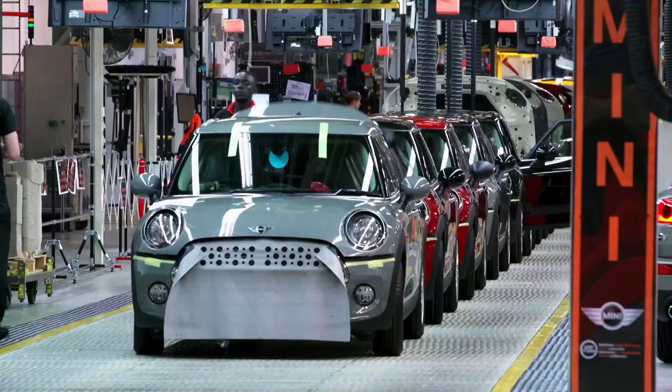Now, this British icon is riding high thanks to a tightly knit team.

There's a lot of camaraderie. We've worked together with a lot of people for a long time, so you build up that team spirit. A strong sense of family.

I grew up in Oxford. My granddad worked here in the 50s and 60s. Basically, I'm following suit. And a unique apprentice program.

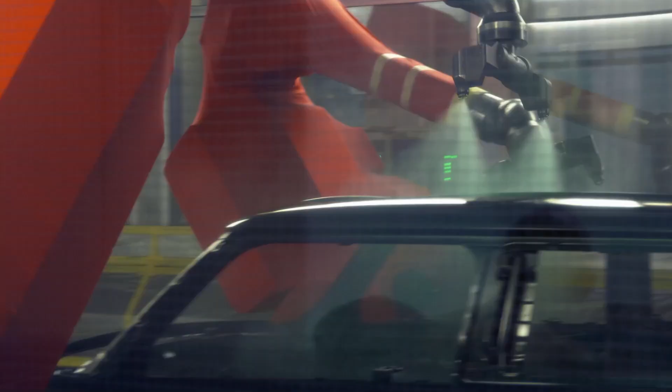We're protecting old school engineering skills. The result is a beacon of industrial hope. It just goes to show the fact that we are still a force for manufacturing within the UK.

Confidence that's best expressed in the fastest Mini ever made. The John Cooper Works edition that we make at the plant here is our supercar. The modern Mini Cooper, the everyman's supercar.

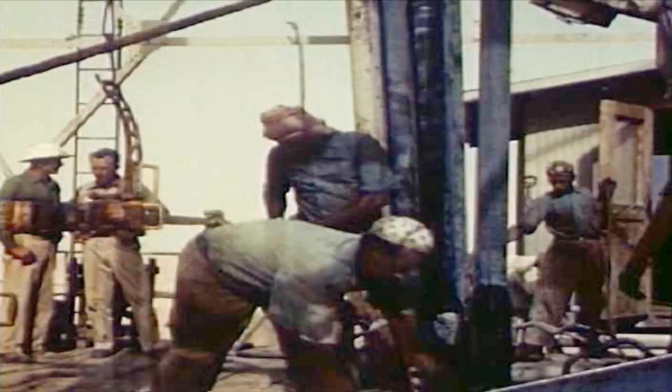It's a car born during a global oil crisis. One of the most influential designs of the 20th century. And a quirky machine that's unapologetically British.

The Mini was born in England, and it's great that it's still produced here. It's ours, it's quirky, it's got a look.

There's a lot of cars out there at the moment that you look at, and you have to see the badge before you know what it is. You see a Mini, you know you're seeing a Mini.

Minis aren't built for statistical bragging rights, but rather smiles per gallon. A fast little turbocharged go-kart, you're pretty high on the thrills per dollar scale.

Few machines offer as much performance in a smaller footprint. The Mini brand has always been about making a lot of performance from a tiny little package.

Base models start at just $18,000. But if you want a little more bang for your buck, the top-of-the-line John Cooper Works edition clocks in at a very reasonable $32,000.

It's going to surprise people, but the Mini is democratized performance. It's a small, quick, sharp-handling car that's a lot of fun to drive at a reasonable price point.

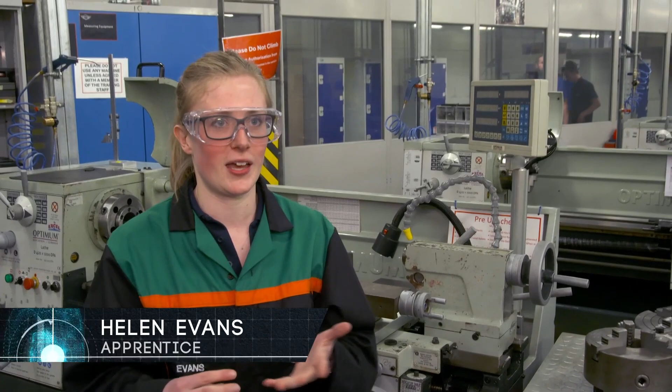Ultra-affordable performance paired with a fervently British sensibility. If you see stereotypical British things, you get the Bulldog, you get the Union flag, and you get a Mini. It's so intrinsically linked, which is nice because every country's got their thing.

Today, the brand sells cars in over 110 countries, and every single one starts the very same way.

It's got a strong brand identity and reaches to every corner of the world. So I often look at the destinations of the cars that we build on the line, and it's amazing. One car to America, the next car to China, then a car that goes to France, then Australia, New Zealand.

The Mini is a worldwide phenomenon that requires 3 distinct factories to get the job done. At the Swindon pressing plant, they manufacture body panels and sub-assemblies.

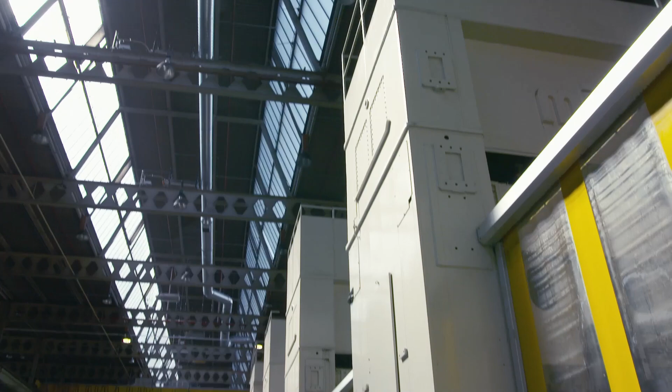They build 3- and 4-cylinder engines at Hams Hall in North Warwickshire.

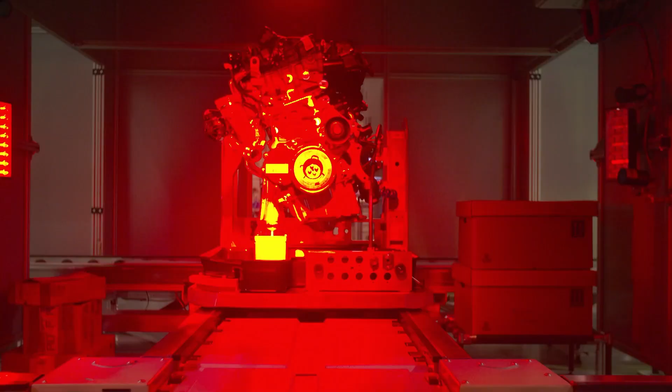And every day they produce 1,000 completed machines at the Oxford assembly plant.

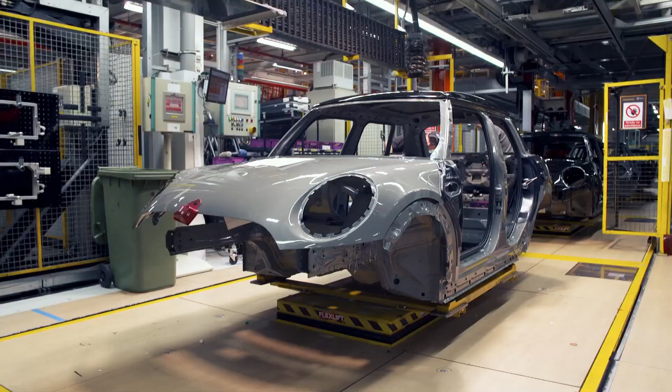Currently, we're building the 3-door hatch, the 5-door hatch, and the brand new Mini Clubman. In the past, we built up to 5 models on the same line.

In a given year, they manufacture more than 200,000 machines.

So the car has come in from the paint shop, comes in a set sequence. We've already started to fit some of the parts of the car.

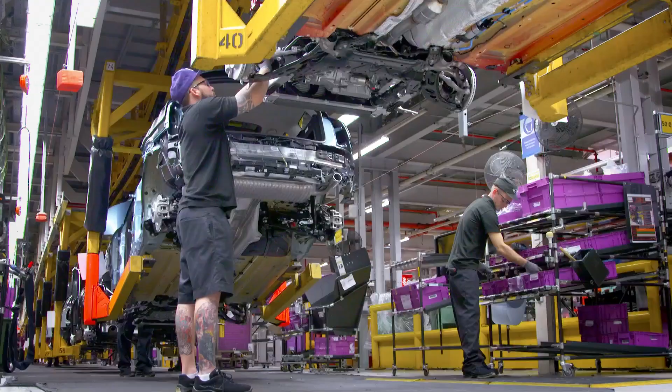Every 68 seconds, there's a car leaving the line. We are working more or less 24/5, so 3 shifts, 5 days a week.

The speed necessitates a lengthy 1.7-kilometer assembly line. There's 224 stations on the main line, so that's from when it first comes in from the paint shop to our final station.

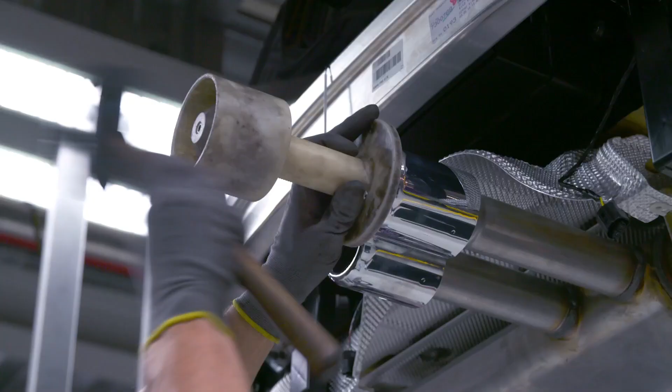Nearly 5,000 craftspeople bolt and wrench parts inside a facility that is nearly the size of 100 football pitches.

We're now at harness fit, so this is one of the really complicated parts of our process. We've got a big thing here, is the oven. We've got 18 harnesses in there, 60 degrees all the time. They're all sequenced in there. We get the harness one by one, we take them out and then we fit them around the car, clip them in, and they're all ready for the people to fix their parts to.

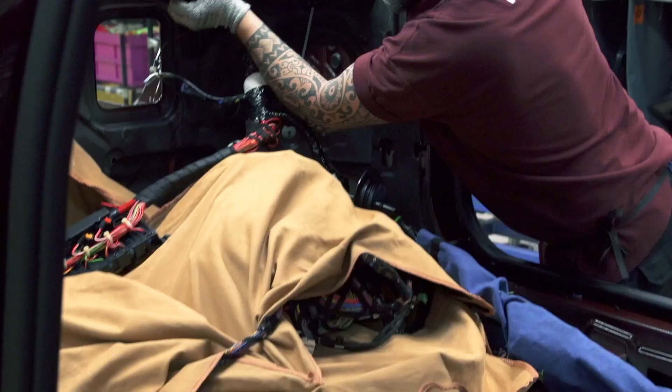Each harness weighs 20 kilograms and has over 500 clips that have to be snapped into place. My section is one of the most physically demanding areas because of the harness, because of the bending, and because of the thickness of the harness. It is quite a hard area. There's little downtime thanks to the high station count and the fast cycle times.

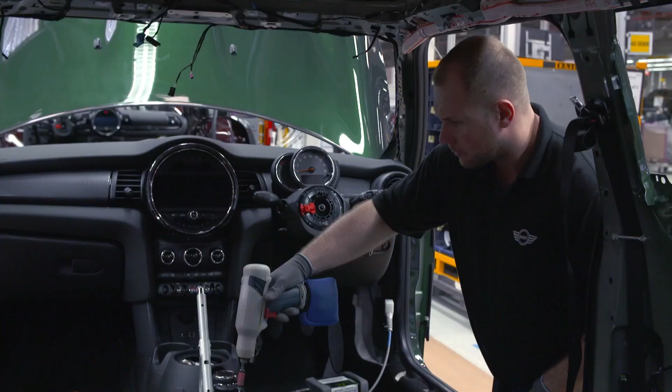To keep the line humming along, workers are backed up by another team of associates. These guys are the front line guys. These are the ones that put the cars together. They're the most important parts of our company. I'm here as a support function, so if they've got an issue, any problems, they let me know and I jump in and let them get on with the next bit.

We do our best. All the blokes, we're all basically on the same page most of the time, and we all strive to build the perfect car. And that's what the Mini is. It's becoming the perfect little car. And it's a good job. It's a proud place to work for, isn't it? The passion here is palpable and historic.

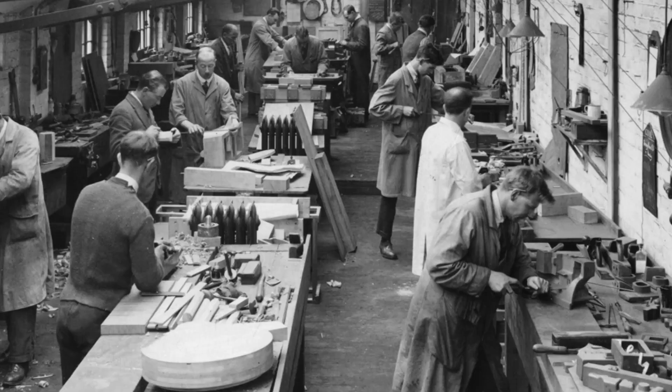This facility is the oldest mass manufacturer of automotives. Built in 1913, the Oxford site has produced over 11.5 million cars, spread over 7 different brands.

No, it's historic, it's iconic. We're very proud to work here and work for the name Mini. Very proud to know that I've been party to the manufacturing of that product. To be a part of such an iconic thing as the Mini, I think for me it's a great opportunity.

There's so many companies who change the basic formula. Mini hasn't done that. It's still a fun driving car as it was back in the 50s when it was first launched. The Mini might be a British icon, but its roots take hold thanks to a French diplomat named Ferdinand de Lesseps.

He's inspired while reading a book about Napoleon's early attempt to connect the Mediterranean and the Red Sea. It takes 37 years, but in 1869, his dream becomes reality when the Suez Canal opens. The waterway becomes a hub for international trade, and by the early 50s, 2/3 of Europe's oil supply travels through it.

However, in 1956, Egypt nationalizes the canal. The act starts a chain reaction that eventually leads to a worldwide oil crisis. The Mini story starts with actually a fuel crisis, an oil crisis, and a need for vehicles to be fuel efficient and affordable.

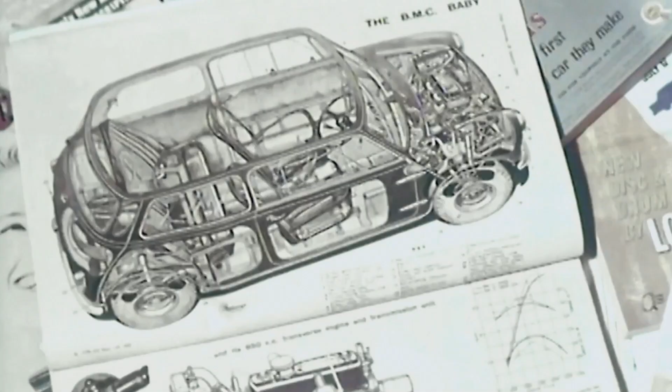In Britain, the government institutes a fuel rationing program that limits motorists to just 4 gallons of petrol per month. The restrictions inspire the British Motor Corporation, or BMC, to focus on fuel economy.

And they ask car designer Sir Alec Issigonis to create a thrifty machine. BMC came to him and said we need a car due to the Suez crisis in 1956. The task has a single mandate: fit 4 people comfortably in a car that can't be longer than 10 feet. He started in his kitchen, I heard, setting up 4 chairs and invited friends and looked at how much space do 4 people need, actually.

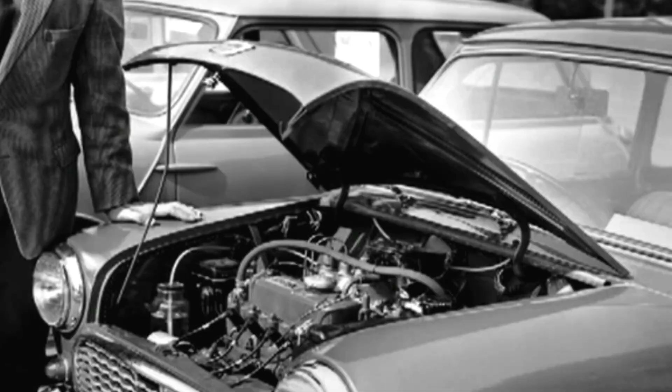Most cars at the time offer rear-wheel drive and use an engine that's longitudinally mounted. Issigonis's inspiration is to spin the engine 90 degrees. His best move was to turn the engine transverse. That's a principle which is set, I think, for small and compact cars till today. It's kind of a really genius construction principle.

Next, Issigonis decides to make his car front-wheel drive. Finally, he engineers a compact transmission that fits beneath the engine, not behind it. Issigonis's entire drivetrain occupies just 2 feet of the new machine and allows the remaining 80% of the space to be dedicated to passengers. As it turns out, he also designed a car that was a lot of fun to drive. And people started figuring that out pretty quick. These things handle pretty good.

They were a lot of fun. In 1959, the British Motor Corporation launches the Mini, a 2-door, 4-cylinder car featuring a monocoque shell. Initially, the machine is offered with a 34-horsepower engine, but gets a whopping 36 miles to the gallon. Heady fuel efficiency numbers even today. Yet it's what happens next that helps coin the term hot hatch.

Just 2 years after its introduction, the Mini's unique design characteristics, remarkable handling, and fun-filled driving experience captivate Britain.

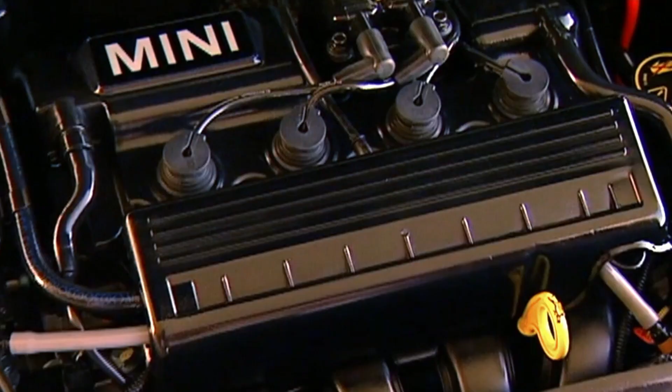This is a brand that, for its humble origins, for being a cute car, actually has a lot of performance behind it. Supercar performance, but affordable to everybody.

Leaving the plant, I see so many of these cars where you can see a big smile on people's faces just driving them. The JCW is fun to whip around a track, but it begins just like every other machine at the Swindon pressing plant.

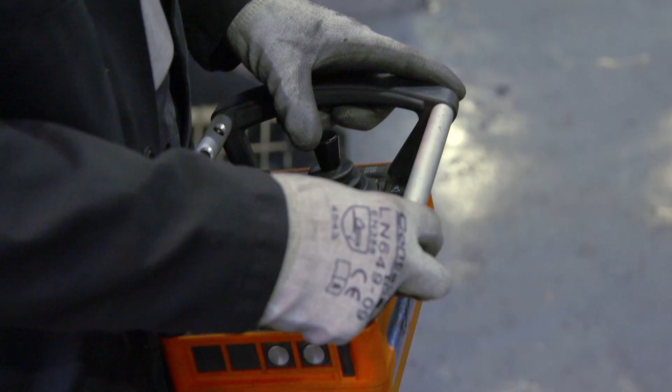We're in the blanking area of the press shop at Swindon. This is the initial step of the process. We take coiled steel, which you can see here behind me, and unwind it into our blanking tools, then cut from that sheet steel.

It is quite big. This coil, for example, is about 20 tons worth. On average, we get delivered about 15 tons in each coil.

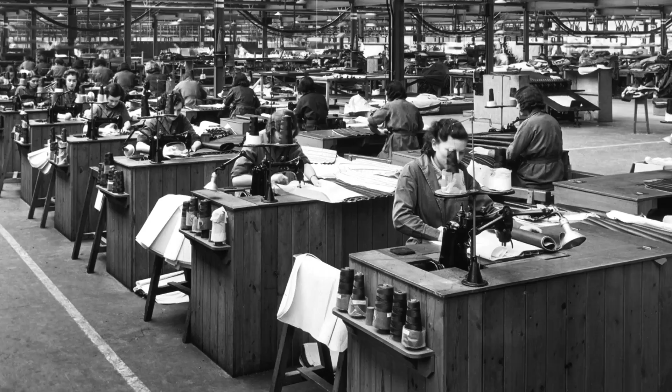The plant starts in 1954 and 5 years later becomes the largest employer in the area. It's a real growing process. You join here as a young guy, a little bit apprehensive of the world around you. As you can see, it's a big factory. It makes you quite nervous, but you grow into it.

At Swindon, they produce nearly 90% of the Mini's pressings and the majority of the sub-assemblies, such as the doors, bonnets, and tailgates.

We're now at the tail end of the blanking process. What we saw earlier was the coiled steel coming in. It's now been through this blanking line, chopped, if you like, into sheet steel. What you can see here behind you is blanks for the mini sunroof.

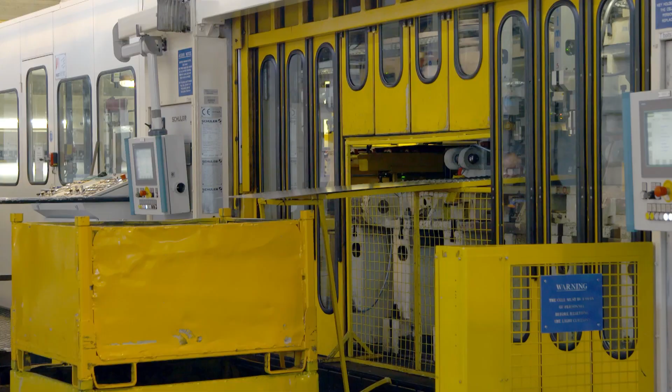The sunroof blanks are extremely thin. The height of each one is equal to just 7 sheets of paper stacked on top of each other. So on a press like this, in the first operation, which is the forming press, all the shaping's done.

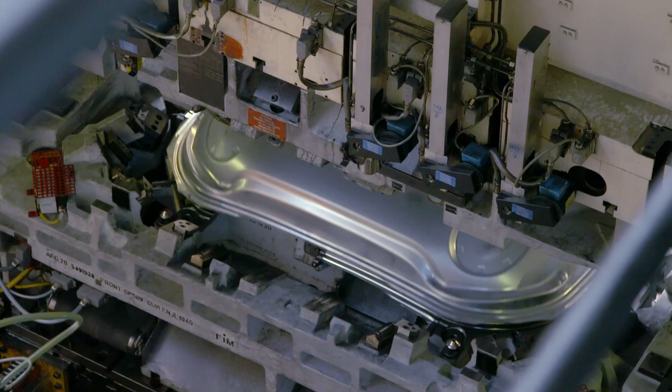Presses vary in age and power. The largest uses 5,000 tons of force. That's half the weight of the Eiffel Tower, and it presses down on a sheet of metal in mere seconds.

This is the final stage in the pressing process. We've cut the sheet steel, we've formed it into a panel, and now we just check the outer surface for cosmetic defects to make sure it's perfect for the customer.

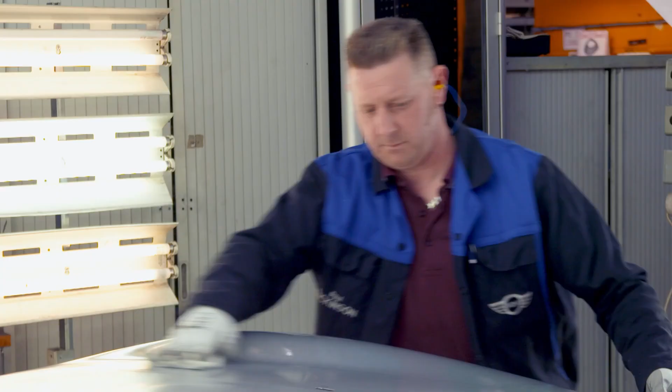After a part is pressed, it heads next door to the welding hall. The parts are brought here, and we assemble them into what we call sub-assemblies.

Over 200 welding robots create body parts a jolt at a time. The robots offer pinpoint accuracy, repeatability in the process, and speed.

The robots better move fast. The welding shop's cycle time is tied directly to the speed of the Oxford final assembly plant. Each individual cell has a roughly 60-second cycle time, which is what we aim for. We have to match the cycle time in Oxford in that respect.

I think the volume of panels produced here is quite mind-blowing. We produce 11,000, say, assemblies a day, which is pretty staggering.

The majority of the finished parts are sent nearly 35 miles to final assembly. This is huge for Oxford—the employment it brings, the kudos it brings. We see visitors every day of the week from all over the world that want to come in and see how the car's built, and that's totally understandable. I'd want to see it.

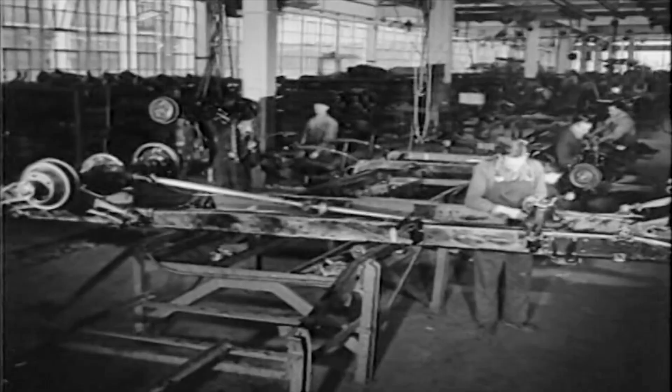The facility opens in 1913, and just two decades later accounts for nearly 30% of England's total exports. But in the back half of the 20th century, the success fades fast. The British automotive industry collapses multiple times. By the 1980s, the plant has already gone through 6 different owners. Years of minimal investment doom it to an uncertain future. The feeling was one of great trepidation. We didn't know what the future would bring, so we knew that the future was very, very difficult for the plant.

In 1994, BMW buys the Rover Group, which at the time owns Mini, for nearly 1.2 billion euros. By the time BMW bought Mini, it wasn't really a car company the way we think of most mainstream car companies. They weren't coming out with new products or anything.

Six years later, BMW relaunches the Mini brand. The goal isn't to help a nation, but rather the bottom line. In the late 90s, BMW had a lot of aspirations to grow, but if they want to expand, they need to have some less expensive cars, some more affordable, everyman kind of cars. They don't want to hurt their name by putting it on something really cheap.

At the time, some critics pan the reborn Mini for being both sacrilegious and a less expensive Beamer. You could see the Mini Cooper as my first Beamer. The modern Mini bears little resemblance to the original Mini. It's much bigger, it's much heavier. It doesn't drive like the original Minis at all.

Other commentators contend the reborn machine opens up a premium product to a broader market. You got people saying, well, I can't afford a BMW, but hey, here's this Mini. It's stylish, it's different, it's fun, and it's built by the same guys that built a BMW 3 Series. There's a lot of that BMW value in this car, so you're kind of getting the best of both—this iconic British style, and that German cachet that you want.

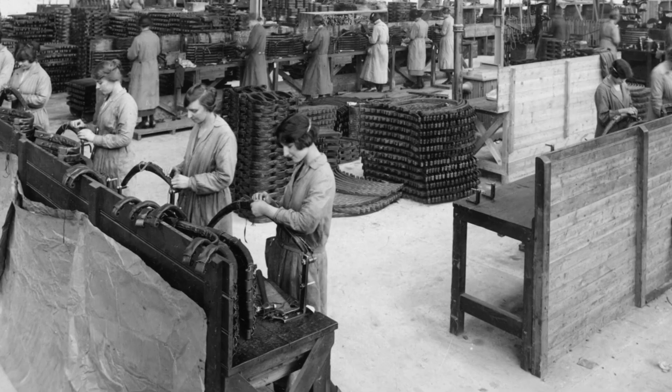I'm the last member of my family to come here. My sister works here, my father's worked here, my grandparents worked here. Back in the very old days, my gran worked here building parts for, I think it was fuel tanks for aeroplanes. My mum worked here in payroll. I'm the last one here.

Having fun starts on the line, but ends up imbued in the car itself. It's just such a fun little car. The feeling is amazing. It's just great, and they're great to drive as well. I have one. It's the people that make the plant.

You could call it love. It's just such a well-known and well-liked brand, isn't it? The renewed version in sort of 2000-ish re-sparks that love for everyone, I think, because it's just quirky and it's not like a sort of bog-standard car. It draws the eye, doesn't it?

The catchy and quirky Mini turns heads thanks to one of the most sophisticated body shops in the automotive world, where every day they assemble 1,000 new shells blazingly fast thanks to 1,000 robots, 6,000 welds, and the hard work of the next generation of Mini craftspeople.

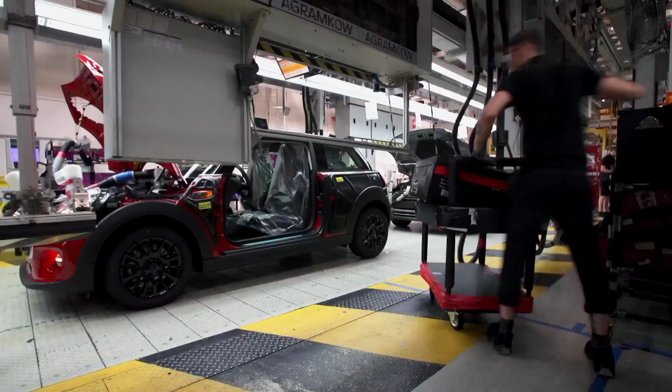Every day at the Oxford Final Assembly Plant, brand new Minis roll off the line nearly every minute. They still build them in England, and they put Union Jacks on the roof and play up the Britishness of them.

The process begins in a highly automated body shop. We're in body in white. The body is what you see being built over here—it's the bare bones of the car. We fit the closures to it. Trim pieces, the windows, the door cards, etc. all get fitted later on.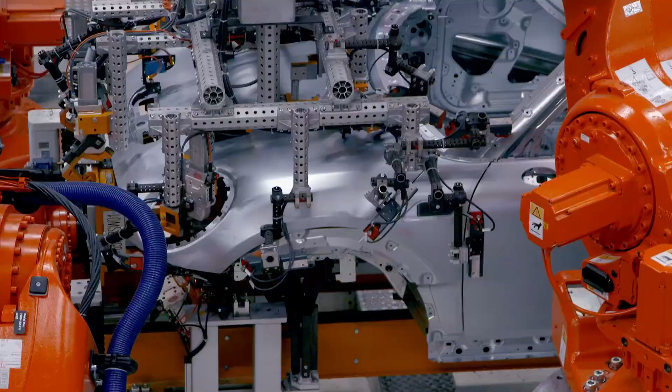BMW spends over £750 million upgrading the site. The total build-up time is around a day from start of the process to end of the process where the car gets delivered into the paint shop.

650 workers split over 3 shifts oversee all the robots. It's non-stop, kicking off at 6 o'clock in the morning. We work round the clock until Friday night. There's constantly something different happening, always with robots moving in the background. You have to keep your wits about you.

Over 435 different steel and synthetic parts are connected, and 90% of the tasks are automated. The body sides get built up in 3 modular steps: framing 1, which you wouldn't really recognise as a body shell; framing 2, where a lot more structural rigidity comes in; and framing 3, which starts to resemble something more of a car. Then the hang-on parts are fitted, and that's where you'll really recognise it as a body.

On average, a finished body in white weighs nearly 400 kilos. Once the welding robots have their fun, a special perceptron camera double-checks the work. The system is accurate up to 1/10 of a millimeter, which is just about the width of a human hair.

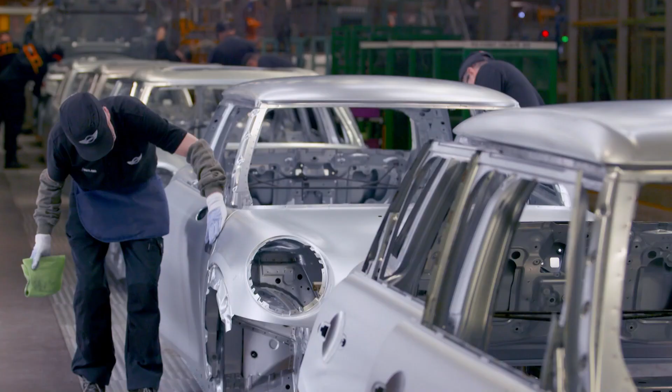When a body is finished, it's time to add a splash of British colour inside the paint shop, where it will take 9.5 more hours to give a new machine its vibrant exterior. We're at the point now where we've got the cars come over from the body in white.

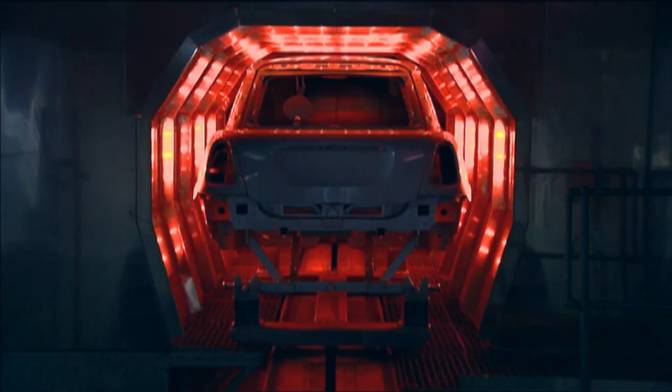The first step is to rinse the body shells in a chemical bath. Our first process is our pre-treatment. It goes through different baths with different chemicals, making sure the car is perfectly clean and ready to take the paint. After taking a quick dip, the body is baked at 180 degrees Celsius, which gives the shell a greenish primer tint. It then goes into a complete dip tank, where we get the first layer of paint, which we call E-coat, applied through electrostatic.

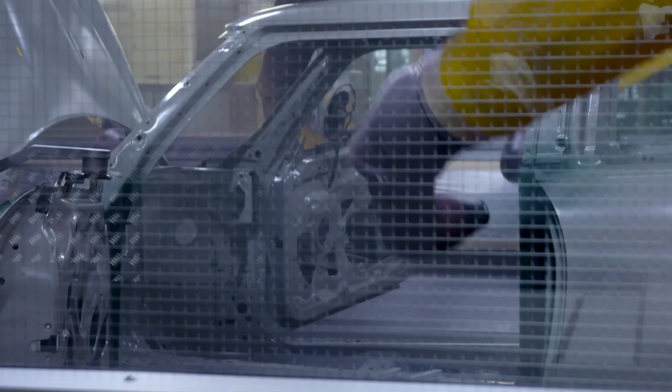A collection of robots applies over 77 meters of seam sealer to each machine. The car will then go through a small area of preparation prior to going into the colour booths, where all the robots will spray firstly inside the car, then outside the car.

The colour booth features 2 different sets of robots. The first are electrostatic machines that apply the base coat and flat colours. However, if you order a metallic finish, then pneumatic robots join the action. In total, it takes roughly 4 litres of paint to cover a Mini.

The huge amount of customization you can do to a Mini gives these cars character. You can get interesting decals, interesting stripe packages, interesting logos, and it's all there to make the car feel a little bit more unique than your typical $20,000 to $40,000 economy vehicle.

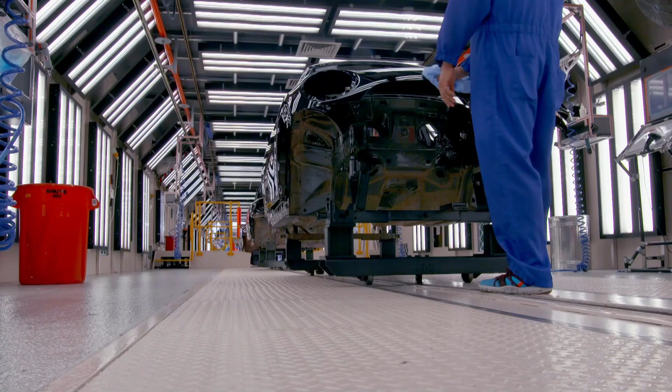The fully automated facility is entirely modern, but it wasn't always this way. I've been here a long time now, I'm in my 38th year of working here, on my 3rd paint shop. When I first started, we sprayed all them by hand, and in those days all the paint had lead in it. We didn't have air-fed masks, just a little paper mask. And that would be our day's work, and it'd be hard.

Tom Bennett runs the Mini paint shop, and his history with the marque goes back a long way. The success story isn't just with me - my father worked in the press shops here for 40 years, and I've currently got both my sons working here, one for 10 years and one for 15 years. When it comes time for me to retire, I've still got my family, and the Mini is a big part of my family and always has been for many generations.

Family connections mean a great deal at the Oxford plant. My brother actually worked here before me, so it was through a referral. A lot of my friends were moving and working here, so I thought, why not take the opportunity? Knowing someone on the inside helps get your foot in the door, but it's hard work that moves you up. I've been within assembly since 2003, and I've slowly worked my way up.

I actually started off on the shop floor as an associate, doing the process the same as these guys, became a team leader, and now a process leader. The healthy amount of upward mobility creates frequent job openings, some of which are filled by former apprentices taught at the Oxford plant.

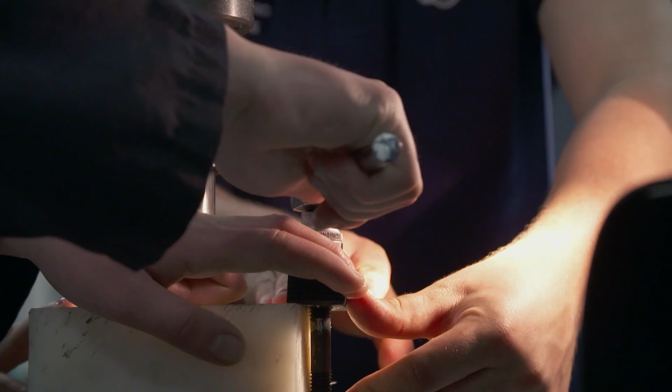In 2012, the brand created the Mini Academy. Particularly in the UK, vocational skills like plumbing, electrical work, and carpentry went into decline, and unfortunately now we're paying a price for that. Each year, 32 lucky youngsters are given the chance to learn the ins and outs of auto production.

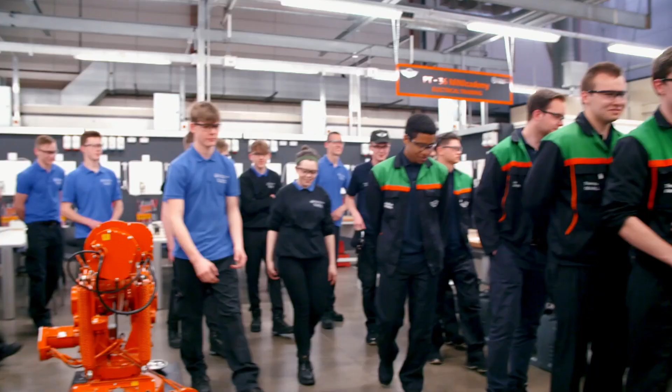It's about growing that person from scratch. We want to influence behaviors, we want to teach life skills. We want these people to want a 40-year career with our business. Jason Gaskell is the head of the apprentice training program.

He runs a highly intensive 3 or 4 year course that offers future employees old world skills while also protecting the brand's future. What we don't want is a situation whereby nobody has that old ability, that old hands-on ability to be able to put their hand to something, to fix it, to keep things going.

While the goal is to cultivate artisanal skills, the approach is utterly modern. Apprenticeships historically were viewed as being for people who couldn't necessarily hack it in an academic forum. That is not the case today. The people you see around you in this workshop are highly academic.

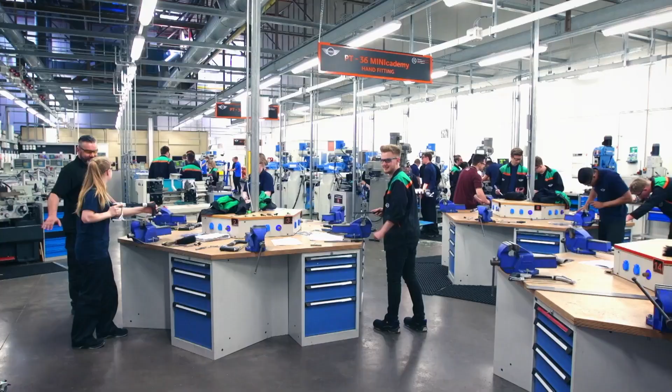New apprentices don't start with tools, but rather mice. The academic program begins in a high-tech classroom. Currently we're standing in what we call the IT suite. As part of their apprenticeship, they need to learn how to design and draw things on CAD, or computer-aided design, which lets the apprentices learn their trade in the virtual world.

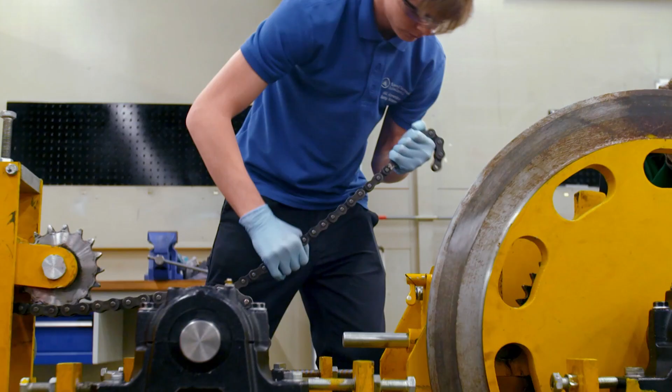After the digital tech, it's time for old-school tools. We're now in what we call our technical training facility, or if I go back to old school, our workshop. I think it's a good mix of hands-on learning and theory learning, and you get to work around with the cool cars, so that's nice.

Even though the factory is extremely automated, the new apprentices start with basic handwork. You can see the people working on the benches doing really basic, down-to-earth skills: filing, drilling, cutting. Things any base foundation person wanting to get into engineering would be expected to do. Once the students master hand tools, it's time to move up to the motorized lathes and mills.

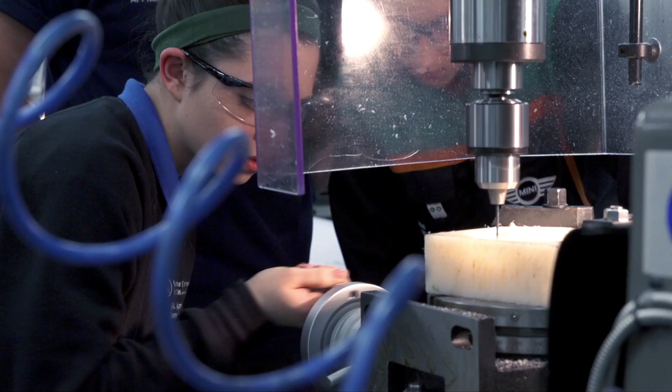In your modern engineering terms, you'd feed that into a computer program and the machine would do the turning and cutting for you. We're still old school here. We want them to physically be able to put a piece of metal into a machine and make something with it.

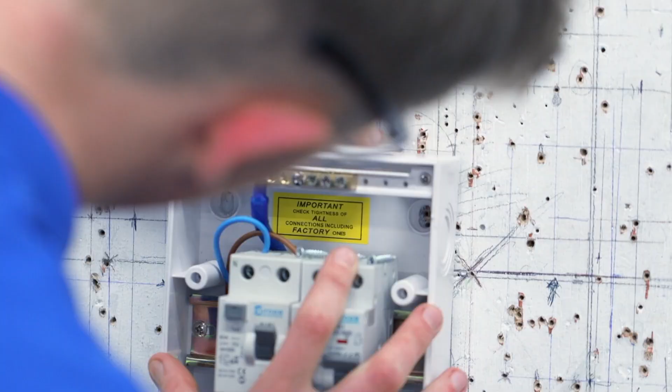After all the tools, it's time for something a bit more shocking. What you see in front of you now is our electrical training area. They do a little bit on what we would term domestic electrical - how do I wire a plug, how do I wire a light - because there may be situations where they need to do that.

Doing the machining, the hand fittings, and the electrical side of it - it's something that I've never known before, and I've learned all these different skills that I didn't even think I could do, and it's possible.

More importantly, they then go on to PLCs and programming, so the equipment that controls our factories - they get to do that. Learning how to program the equipment inside the plant is critically important.

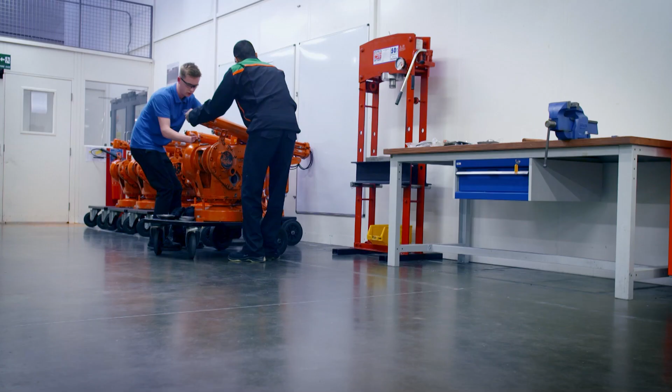Although technology is taking massive leaps forward, there are still big bits of equipment that sit out in our factories that need to be fixed. Nothing runs forever. Our utopian world would love us to have a situation like that, but it doesn't exist. So what these young people are learning is, should something go wrong at 2 o'clock in the morning, they have the ability to get that fixed quickly.

Rapid solutions and intelligent problem solving are critical skills inside the Oxford plant, where brand new Minis roll off the line every 67 seconds, and each shift, 700 workers put their hearts and souls into every machine.

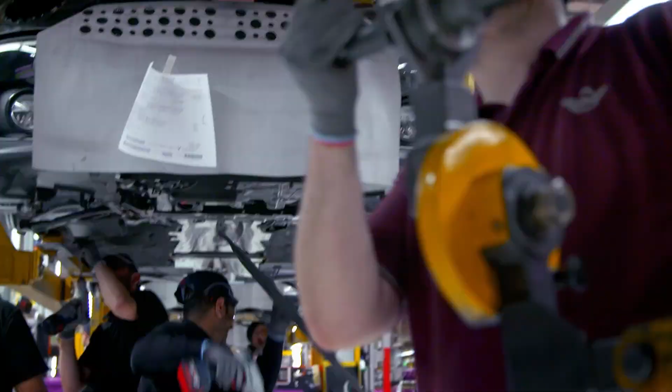It's getting your hands dirty. It's finding out how things work. If you like that sort of thing, you like working here.

We are proud of the product, so we want to make sure it's good for the customers and everybody enjoys it. 2,300 people work on 8 distinct lines under this roof, producing 1,000 cars a day - something we're very proud of.

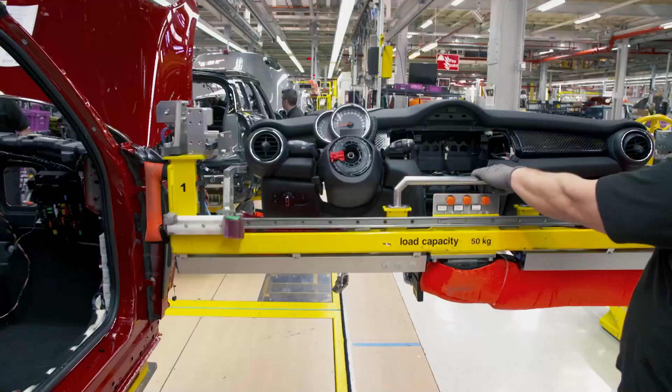On the track, modern Minis move forward at a nice clip, but if you look down at the dashboard, it's a throwback to another time. They keep it small - there's no deviation from their philosophy. I think the thing I like most about Mini is that it's unrepentantly Mini. They do it their own way, and that's it.

Installing the iconic dashboard takes place at Station 20. We're now installing the cockpit into the vehicle. It's very, very precise, only just fitting into the aperture of the door. It's then fitted onto its locating points on the dashboard, and secured to the vehicle.

Simple bolts secure the dashboard.

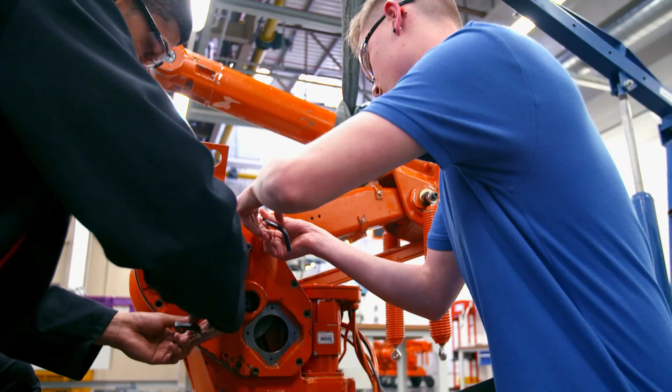Back in the Mini Academy, the goal is to secure the future of the brand. It takes us 4 years to qualify an apprentice, but we can prototype, launch, and build a car in 2.5. So that gives you an idea of the time-scale of what apprenticeships are all about. They're a massive investment for the long-term strategy of a business.

The long-term plan starts in a very internet-savvy way. I applied through going online on the Facebook page.

Some apprentices arrive online, others show up in need of change. I did do a degree in politics, actually, and then I realised I didn't want to do that, so had a bit of a career change, and here I am.

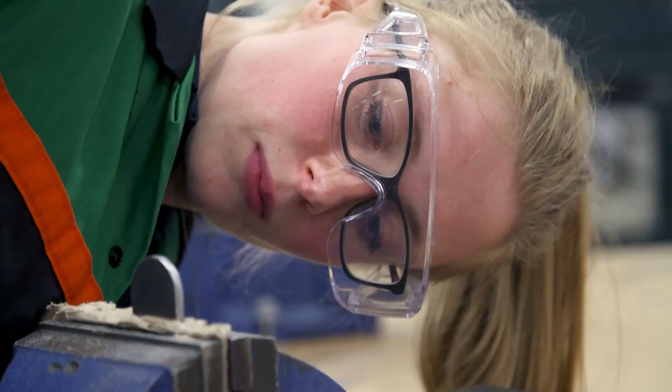When you say it to someone, it always sparks a conversation. It's not some unknown company - they're like, what do they do? It's quite easy to talk about the cars and where things are going. So that's always interesting.

It's easy to see where the Oxford Mini plant is headed. Today, the facility is responsible for more than 10% of all automotive production in the UK, including the hottest Mini of them all, the JCW.

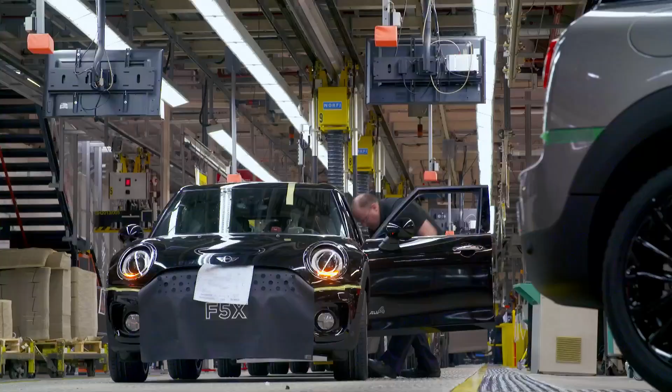The John Cooper Works Edition is the fastest machine that Mini has ever made. Its 228 horsepower, 2-litre twin-turbo motor is built inside the Hams Hall facility, where over 7,000 3- and 4-cylinder motors come to life every single day.

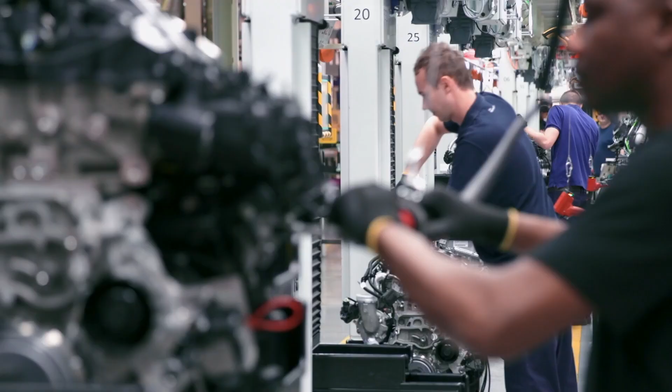We're in Plant Hams Hall. This is an engine plant where we machine and assemble engines. Behind us is the start of the cylinder block line, where we machine the cylinder blocks that go into Mini.

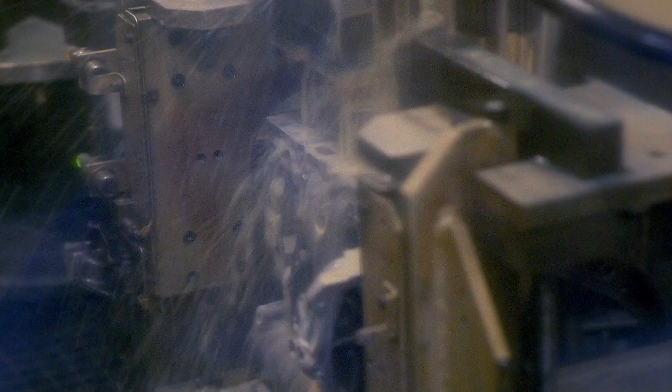These are raw parts. They come to us, cast externally, and come here for us to machine them. The stations move in under 30 seconds, and it takes about 8 hours from start to finish to build a new motor.

This is the start of the process where we launch the cylinder head onto the assembly line, and it then takes a number of stations to get assembled. We have machined heads that are machined next door in our machining hall. They come in a pallet, get delivered, and then get loaded onto the assembly line via the robot.

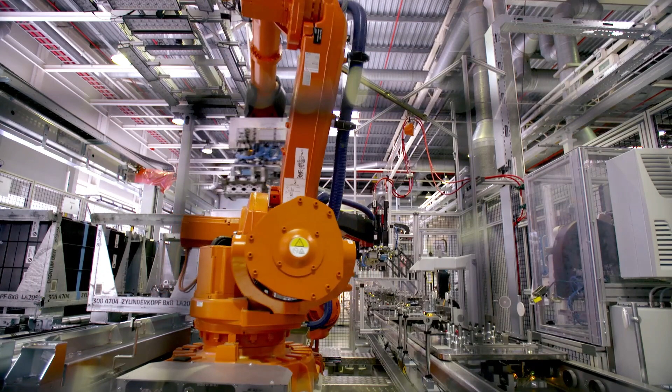The machined cylinder heads are assembled and tested. What's being done here is visually inspecting the part just to make sure there's no defects in the components. The problem with machining is that it will uncover defects in the casting.

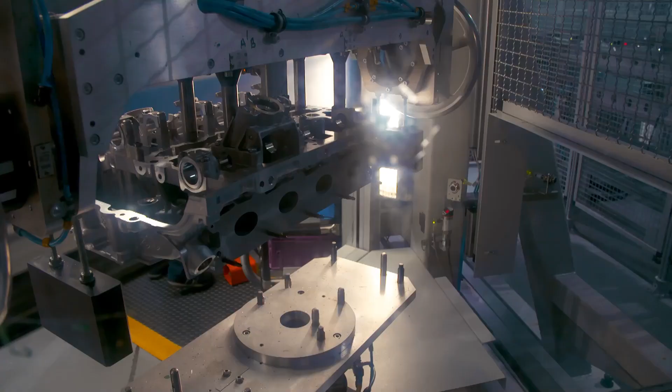In another part of the factory, they work on the crankshafts. We're on the crankshaft machining line, very close towards the end of the process. This is a super finishing process. There are 3 steps: a rough tape, the finishing tape process, and then another tape that picks up the parts of the crankshaft that don't get picked up on the particular one here.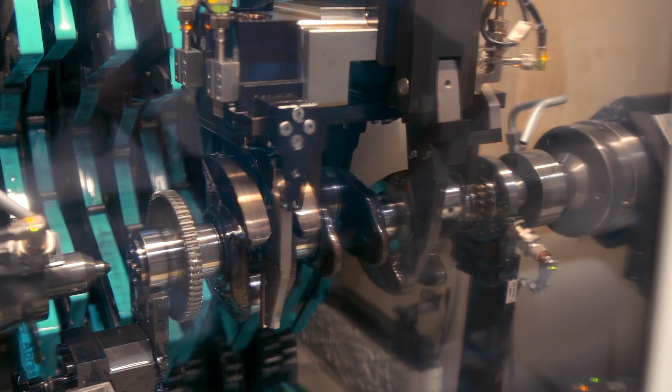It's a very fine paper - as you can see, 1500 grit, it's very, very fine. It's developed on a continuous roll, so it continuously rolls around, so you've always got fresh tape.

On another line, pistons are built up. This is a sub-assembled piston and conrod. They're basically travelling now on their journey to the piston fit station, where they'll marry up with a block.

It's time to build a new motor. The crankshaft is installed. New engines then receive their unique identification number. Pistons are connected.

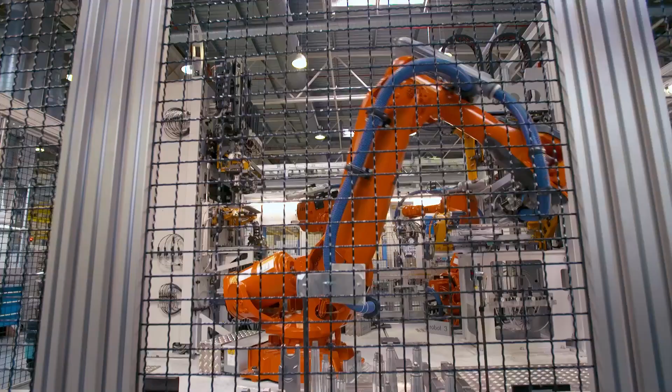Some of the parts are very intricate, and so it can be very demanding for automation to do that sort of work.

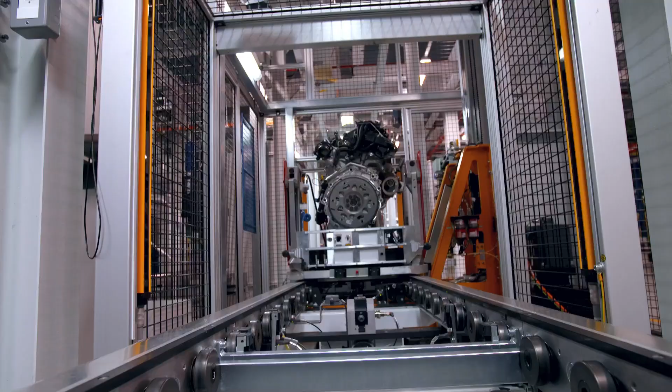They fit the turbochargers, the inlet manifold, and engine harness. So at this point, it becomes a unique engine going into a unique Mini.

The motor is now ready to be sent down the road to the Oxford Final Assembly Plant, where it will be delivered directly to the powertrain sub-assembly line.

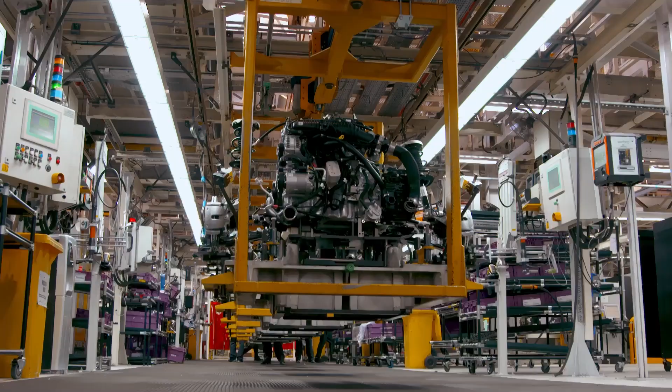Our engines come from Hams Hall as a completely built-up engine, but what we now do is build them into the front suspension unit. So we marry the engine to the subframe and the front suspension, and this is what you see behind us. 55 craftspeople work across 25 engine sub-assembly stations. Every single process is exactly timed against 64 seconds, so meticulous planning of every single element of every single process is planned down to the last second.

Once they finish sub-assembling the motor, it's transferred across the aisle, where a new Mini eagerly awaits its power plant. Where we're standing now is what we call marriage - that is a place where the engine is married with the car, and we've got a split marriage, front axle and engine and gearbox. So it's a very precise element of the production. With the engine, it's very tight to go into the cars.

We're talking millimetre gaps between the engine and the body. To achieve the required precision, the team relies on a special automated system which raises the power plant 15 centimetres beneath the car. Then 4 robots bolt the drivetrain, subframe and suspension to the car. 8 bolts hold the engine into the car from underneath, and then there's further ones from the engine bay downwards.

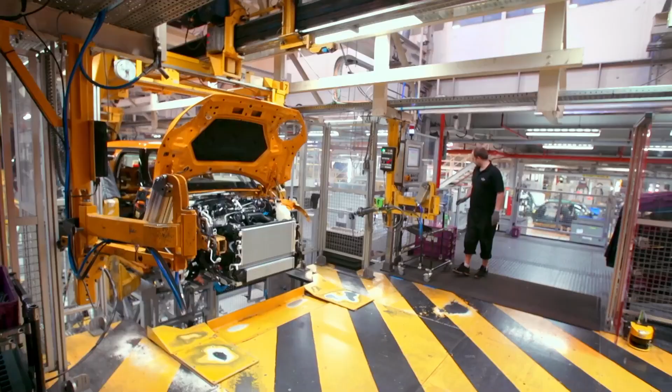The car becomes a real car. Now it's married, now it's proud to call itself a car.

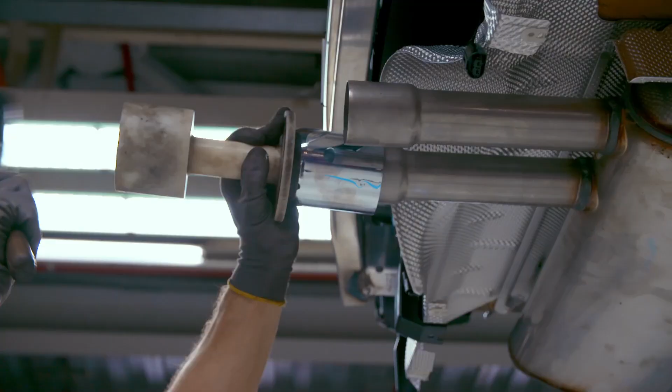Workers bolt the exhaust onto the new engine. The big pieces we're installing here are the rear exhaust, the heat shield, and further down the line, the modular front end, and also seats. They are fitting the exhaust onto the hanger bracket. This guy secures it in the front, and this guy's putting on the nice chrome finish so it looks quite pretty at the end. We're going to put nice, shiny, pretty things on the cars.

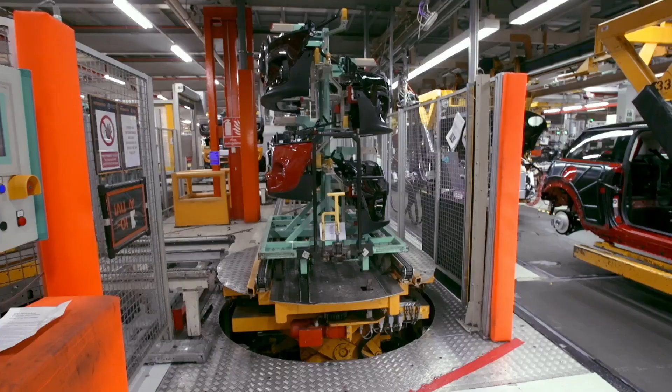The battery is connected. This is the part where we fit the front end of the vehicle - the front bumper, the front radiator, basically the front frame of the vehicle. Behind me, the parts come in sequence. They're brought in exactly the build sequence that we have going through our production line. So they take them off the rack they come in on, an assister, and then they mate it up to the front of the vehicle. So it's the front end marriage.

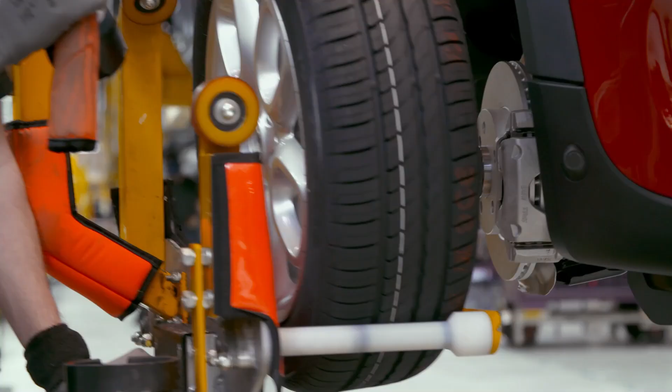Further down the line, workers fit the sport-orientated wheels. We fit the wheels and secure them. Then further up, we have the underbody, which is mainly under paneling.

Wheels which help give the Mini its responsive steering. People love them for racetracks and back roads. It's a fun, super responsive little car that you can just whip around anything.

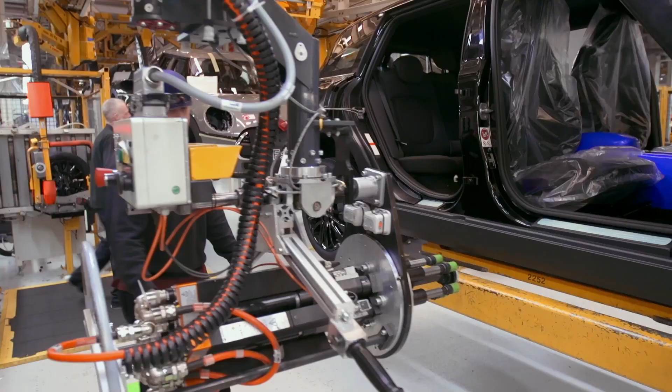I've been here 14 years now. It's great - it's a good company, good to work for, good environment, a lot of good guys here, so it's a really good company. The wheel fit station is fast and efficient, yet it hides a tremendous amount of complexity - there are over 42 different wheel and tyre combinations available.

Once the safety systems check out, it's time to program the Mini's key. I love what I'm doing, the key programming - I really enjoy the job. I have to be very careful watching what I'm doing, checking the numbers for the right car.

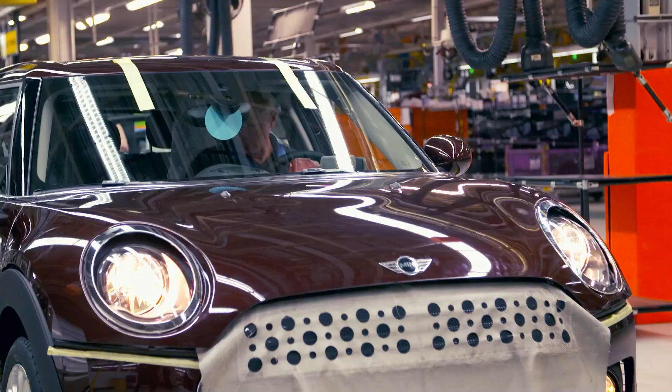Finally, after 1.7 kilometers of assembly, a new Mini is ready for the real world. So we're on the finishing line - this is basically the end of where everything's finished. This will then drive off around next door into validation, ready to go to the customer. It's taken 5.5 hours to build a new Mini. The quality control process is extremely thorough, but for some machines, it's even more intense.

Once a day, they pull a selected machine off the line for extended testing.

Not all of our customers live in the ideal climate. We have variations between whether or not you're looking in Pacific areas or Asia areas, where you're talking about quite high humidity, and in certain areas which have high sunshine. So this is our climate chamber - you can go down to minus 30 degrees Celsius and up to plus 60, and we can do 98% humidity, so we can really make it a very warm and humid atmosphere.

It's very, very unpleasant. After a machine heats up and thaws out, it takes an extended bath in a water test booth. This is the water test rig, another area where we torture our cars and really make sure that they are tested to the absolute limits.

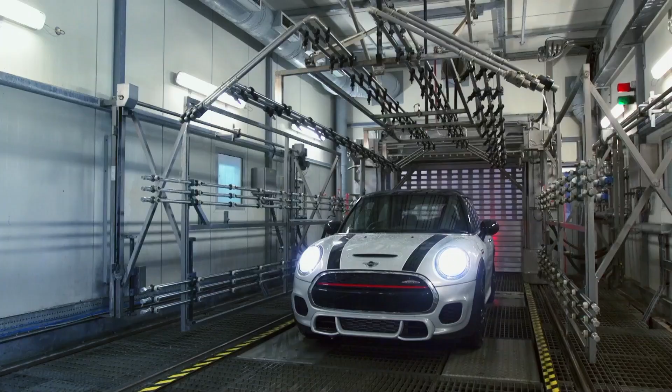They run the water test for a day and a half and have the ability to turn the machine side to side and on an angle. Some people may have to park like that at their homes, basically for the whole lifetime of the vehicle. After washing off, each machine hits a few bumps.

We're in the shaker rig area - this is the 4-post shaker rig. We're just putting it through its paces to understand if there's any squeaks and rattles on the car. I think the challenging part is actually about trying to understand what the root cause of something is. You can always hear a noise - any customer hears a noise in a car, but trying to find out exactly what's causing it is the main issue. It's always the most difficult thing to do.

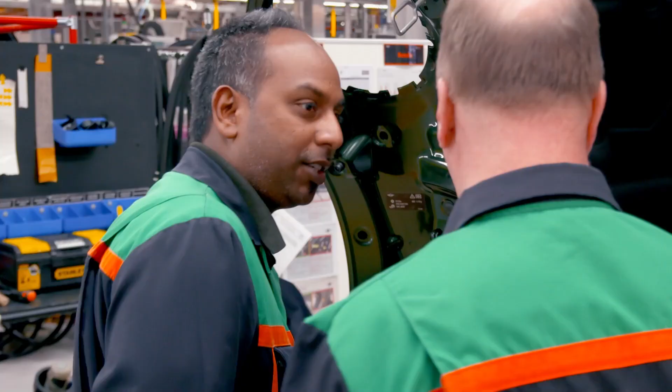Diagnosing unwanted sounds is difficult, but in Oxford, the really hard times passed long ago. I've been at Mini Plant Oxford now for 15 years. When I first started, it was probably about 40 or 50 cars a day. Now we're making a lot more cars. The Oxford plant builds nearly 200,000 machines a year. It's a remarkable turnaround for a brand that was once on the ropes.

What Minis do is focus on the lighter side of driving, the more fun stuff, the more not-so-serious stuff. Their designs aren't cute, they're playful, and that's the way these cars drive. The current top-of-the-line machine is the JCW edition.

The fastest, coolest, and costliest hot hatch the brand has ever built. The John Cooper Works edition that we make at the plant here is our supercar. It doesn't come with a massive price tag, but it's a really exciting, sporty car.

When you see the JCW badge on the back of a Mini, you know this is the one that's sporty, this is the one that's fun to drive, this is the one that harkens back to those old cars. JCWs are fun to drive. You get more power, more tire, suspension that's tuned to be more aggressive. You get a little bit more excitement out of the stuff that I'm interested in, the passion of driving.

The JCW's 228 horsepower engine thrusts the machine 0 to 100 kph in 6 seconds flat and offers a top speed of 246 kilometers per hour. All for about €32,000.